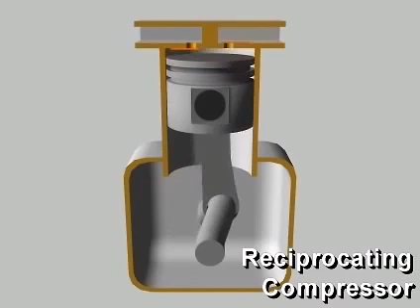A reciprocating compressor compresses refrigerant vapor in a cylinder using a piston. In a way, reciprocating compressors are like automobile engines. The pistons are directly driven through a wrist pin and connecting rod from a crankshaft.

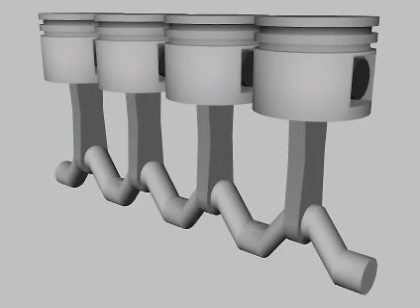Depending on their size, reciprocating compressors may have one or more cylinders. Multiple cylinders may be arranged in line, opposed, or in a V.

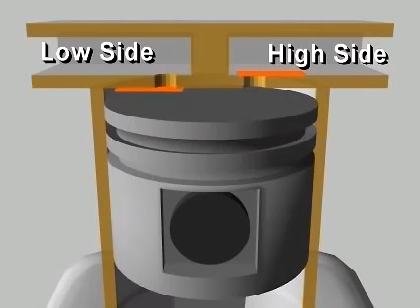In each cylinder, reciprocating compressors have both a suction valve and a discharge valve. These valves give the compressor its ability to pump refrigerant vapor against a pressure difference. They are usually located in the head of the cylinder, in passages connected to the high or low pressure side of the system. Let's follow the compression process in a single-cylinder reciprocating compressor during one complete revolution of the crankshaft.

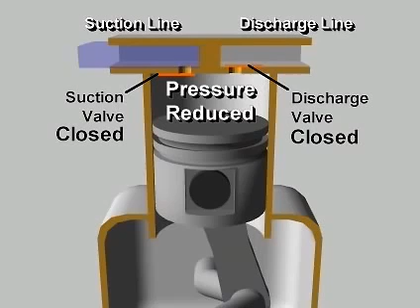Starting with the piston at the top of its stroke, or at top dead center, the piston begins to move downward as the crankshaft rotates. Because both valves are closed, the downward moving piston reduces the pressure in the cylinder. As the pressure in the cylinder falls below the low side pressure in the suction line, the pressure difference opens the suction valve, letting refrigerant vapor flow into the cylinder.

The piston continues down and pulls in more vapor until the cylinder is filled with low-pressure vapor at the bottom of its stroke. Once past bottom dead center, the piston begins its upward stroke. The suction valve closes. As the piston moves up, it reduces the volume of the space in the cylinder, increasing the pressure of the vapor.

When the pressure in the cylinder exceeds the high side pressure in the discharge line, the pressure difference pushes the discharge valve open, letting the compressed vapor flow out of the cylinder. This continues until the piston reaches the top of its stroke and most of the compressed vapor has been expelled into the discharge line. When the piston begins its downward stroke, the discharge valve closes.

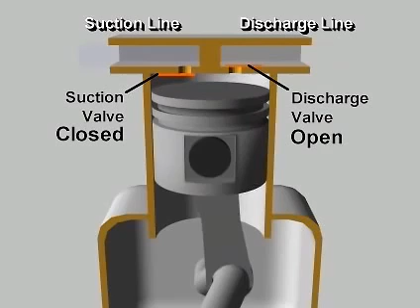The complete cycle then repeats during each revolution of the crankshaft. This is the mechanical positive displacement vapor compression cycle using a reciprocating compressor.